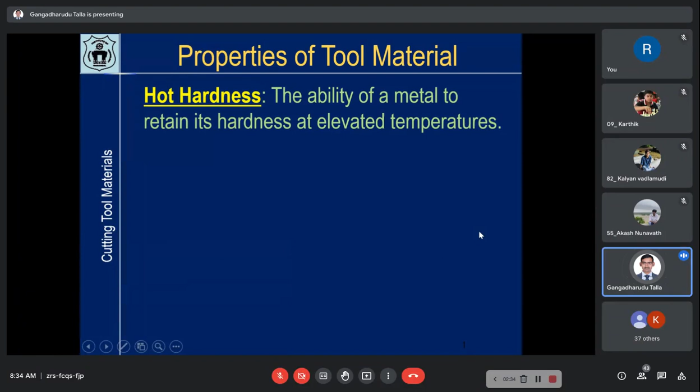Now next is toughness. What is toughness? Resistance of a material to breakage, chipping, or cracking under impact or stress. So toughness is opposite to brittleness, to understand it we can say like that. So what is toughness, in your words, you can say what is toughness. Here exact definition is not given. Here they are saying it is resistance of a material to breakage, chipping, and cracking under impact or stress. This is an indirect way of putting the toughness definition. What is the simple definition of toughness?

Resistance of the material. Resistance to... yeah, resistance to what? To oppose the deformation. Yes, toughness is resistance to deformation, or the ability to absorb the energy for a given material. So if the tool material is tough, it will not break, instead it will absorb the energy and it will not deform. If the toughness is high, it will not break also at the same time. If it is brittle, it will break; but if it can absorb the energy, it will not break, up to certain limit, if the toughness is high. So it will oppose the deformation. That is also important - tool should not deform during cutting process. If it is deforming, then obviously you will not get the required finish, etc. So it should not deform. So for that, it should have good toughness and wear resistance.

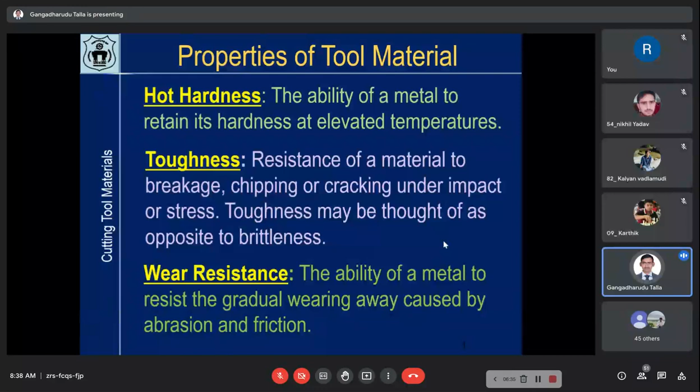Now here, this hardness ranges for various tool materials is given. We'll talk about these tool materials, but you should understand these are the hardness ranges. HSS tool 83 to 86. Cast alloys 82 to 84. Carbides, tungsten carbide 1800 to 2400. Titanium carbide up to 3200. Ceramics 2000 to 3000. CBN is cubic boron nitride, about 4000 to 5000. And diamond about 7000 to 8000. These are the hardness ranges. So based on the application, meaning the type of workpiece material and the process parameters, we have to choose the appropriate cutting tool material.

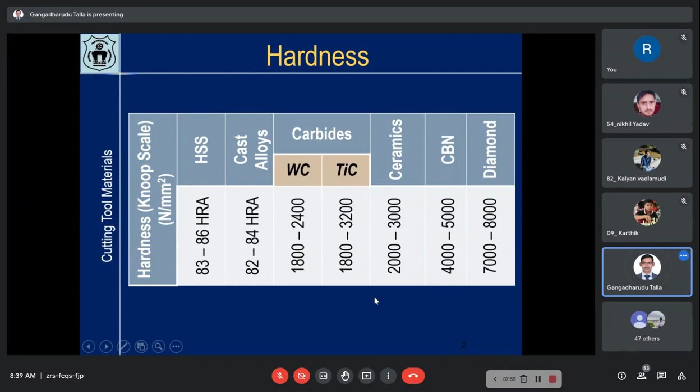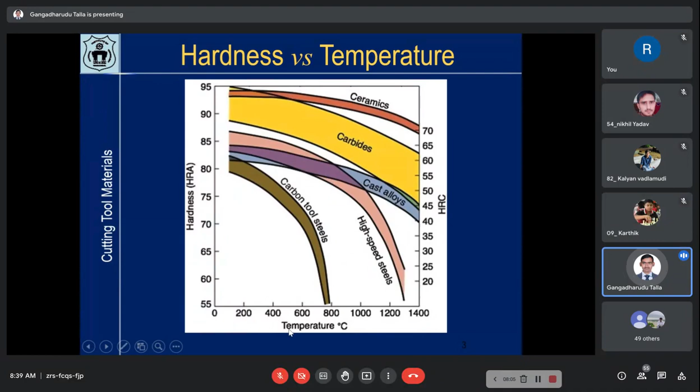Now hardness versus temperature, we all know that. Here you can see as the temperature is increasing, hardness is coming down for any material.

If you see carbon tool steels, their hardness is coming down rapidly with temperature. If you see ceramics, as the temperature is increasing, the hardness is coming down anyhow, but the rate is not very high. So ceramics can withstand higher temperatures without losing their shape, followed by carbides. High speed steel is also losing its hardness at elevated temperatures, but it is better than carbon tool steels. So with temperature, hardness is decreasing, and ceramics have better hardness compared to other materials.

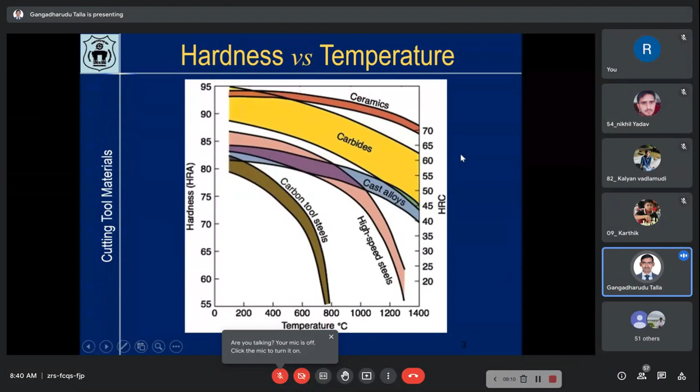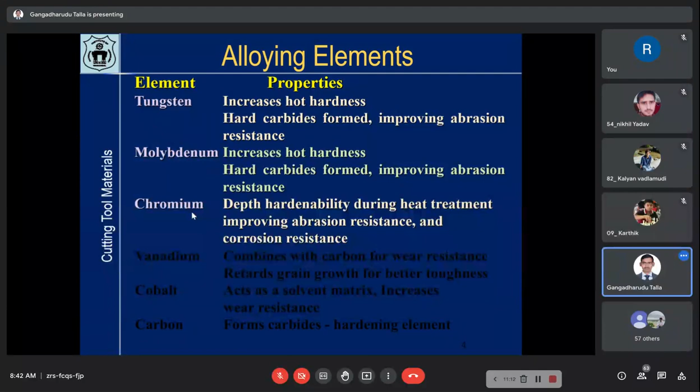Chromium deepens hardenability during heat treatment, improving abrasion resistance and corrosion resistance. So the main thing here is corrosion. If you are including chromium, corrosion resistance will improve. Corrosion resistance is also one required property for the tool material, but it is not the very important parameter.

Vanadium combines with carbon for wear resistance and retards grain growth for better toughness. So if you are adding vanadium, it will decrease the grain growth, that means you will have fine grains, and fine grains mean better toughness. If you have larger grains, then it will become brittle and it will break.

Cobalt acts as a solvent matrix and it increases the wear resistance. So cobalt will be generally used with tungsten, the tungsten carbide and cobalt combination, where it will act as a binder.

Carbon, obviously, forms carbides, so it is a hardening element. Hardness will increase when you are increasing the carbon content.

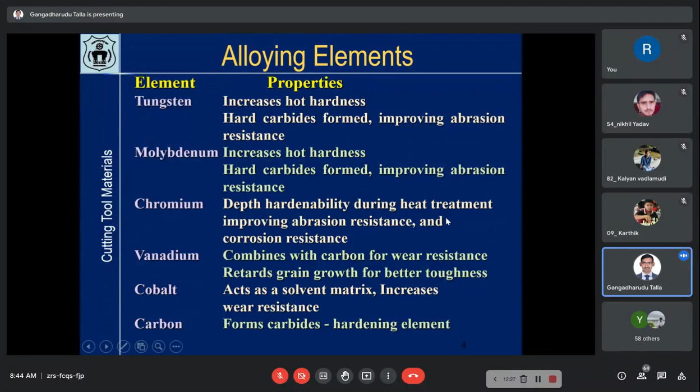Now coming to the types of tool materials one by one, first we will see the carbon steels. High carbon steels are used as cutting tool materials. Carbon range is like 0.6 to 1.5%. So it is a steel, but high carbon steel.

Now small percentage of silicon, manganese, chromium and vanadium are used to help refine grain size and increase tool hardness. We have seen, by including some of these like chromium, vanadium, etc. But silicon and manganese are also given here. We have not discussed those separately, but silicon again will increase the hardness, etc. So we are including them for increasing the toughness and hardness.

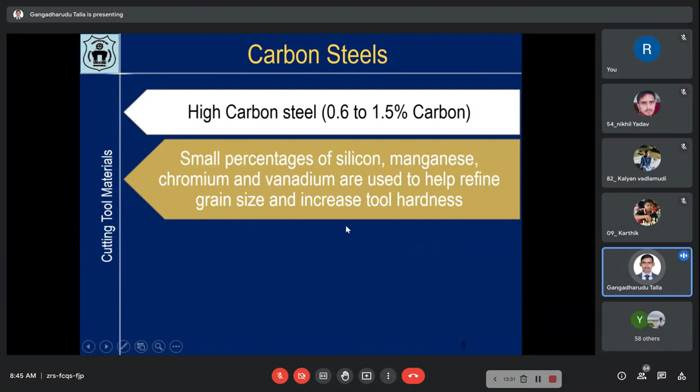So one advantage is they are easily shaped and sharpened. You can easily make the required geometry for the cutting tool because machining carbon steels is not very difficult. So that is the advantage.

And greater resistance to abrasive wear. So this is also one advantage. Abrasive wear will be less.

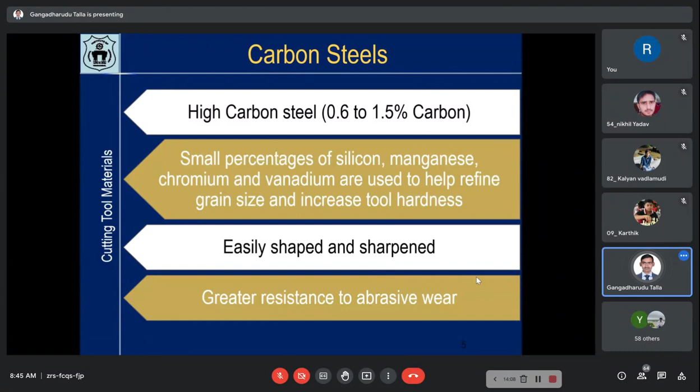Now widely used for files, saw blades, chisels, taps, broaches, and reamers. These are also cutting tools. A file, we will not say it is a single point cutting tool, it is a kind of tool, not exactly a cutting tool. We will say files, saw blades, chisels - these are all tools used to remove material. So they can be made with these carbon steels.

You might have already seen in workshop. Have you gone through workshop? Have you visited the workshop or have you been to workshop? Maybe some of you - yes sir. Yeah, so there you might have seen these files, you might have done filing for fitting operations. So those files are carbon steel files only. Chisels also you might have seen in carpentry, etc.

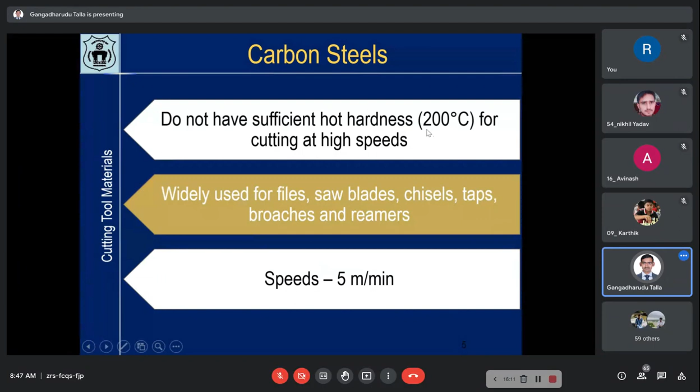So that is about carbon steels. Now the next type is high speed steels, short form HSS. This is a very famous cutting tool material, one of the tool materials developed for cutting tool purposes in the initial stages. That's why the name is given as high speed steel.

At that point of time, this cutting tool material was used at higher speeds. That was the high speed at that point of time. But now things have changed, now this is low speed only. But the name has remained the same, so high speed steel.

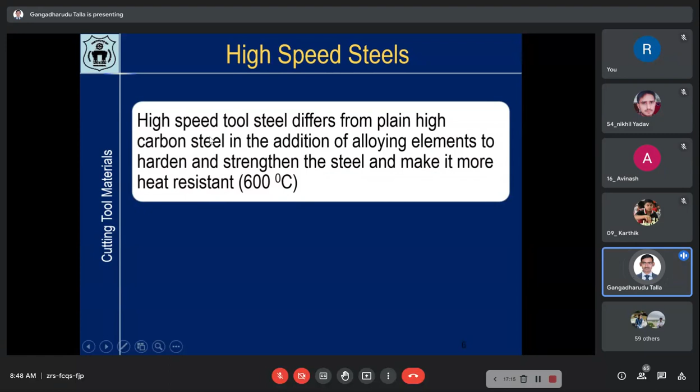High speed tool steel differs from plain high carbon steel in the addition of alloying elements to harden and strengthen the steel and make it more heat resistant. So it can be operated up to 600 degrees Celsius. Hot hardness is high.

So alloying elements include manganese, chromium, tungsten, vanadium, molybdenum, cobalt, and niobium.

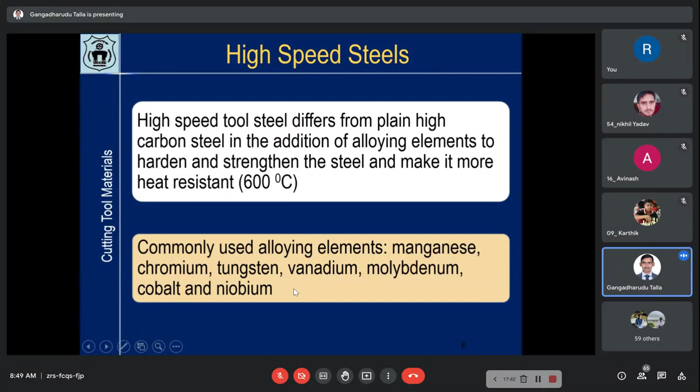So here there are two series in HSS. One is called the M series. Here you will have 10% of molybdenum with chromium, vanadium, tungsten, and cobalt as the remaining materials, and of course the rest will be ferrous. This represents tool steels of the molybdenum type. HSS M series means molybdenum type, so 10% of molybdenum.

Another is the T series. Here the tungsten content is high: 18% tungsten, 4% chromium, 1% vanadium, and cobalt as alloying elements represent those of the tungsten type. So this is T series because of tungsten. Even though the chemical representation is W, it just starts with a T, so it is T series.

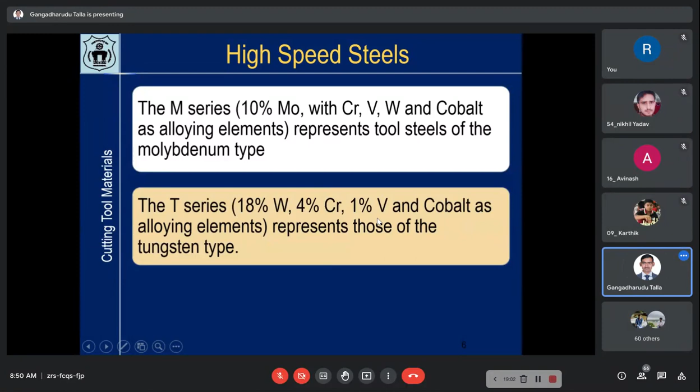The tool geometry and mechanics of chip formation are complex, such as helical twist drills, reamers, gear cutters, form tools, broaches, etc. So HSS tools can be used for complex cutting tool materials. Now what is a complex cutting tool material? A single point turning tool has a simple geometry we can understand, but if you are talking about a drill bit, a twist drill, you will have flutes cut on the drill bit, a helix shape. So that is a complex shape. For such cutting tools, we can use HSS material.

Reamer, then gear cutter, that is also one kind of tool. If you are talking about any form tools, forming operations on a lathe machine, there you can use the HSS material.

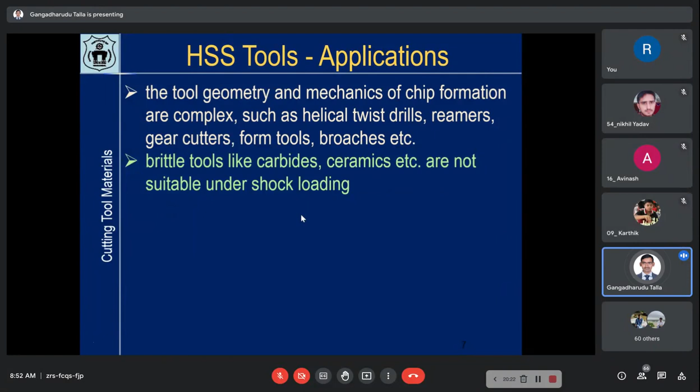Now brittle tools like carbides, ceramics, etc. are not suitable under shock loading. So shock loading means the force is varying. Whenever there is varying force, brittle materials cannot withstand it, they will break, even though they are hard, if they are brittle, they will break. So HSS's advantage is mainly that it is tough. Toughness is high, very high compared to many other tool materials. I will say it has the best toughness among these tool materials.

So it can be used for shock loading cases. Now, when will you encounter this shock loading? Suppose step turning, or if you are doing some eccentric turning, then in those cases you will have this shock loading.

Small scale industries cannot afford costlier tools. That is also one of the reasons for using HSS. HSS is cheap compared to other tool materials like carbides, or any other. CBN or diamond is anyhow very costly.

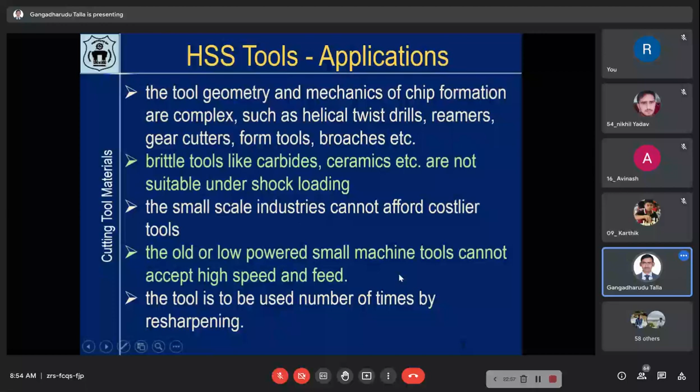Now another type of tool material is cast cobalt alloys. A typical composition for this class of tool material is 45% cobalt, 21% tungsten, and 2% carbon, which gives a hot hardness of 750 degrees Celsius. So its hot hardness is better.

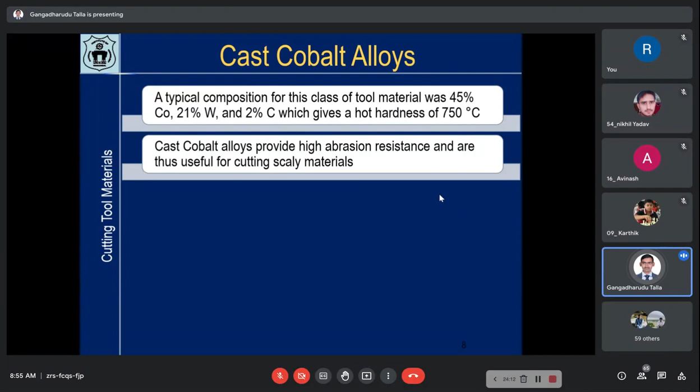Cast cobalt alloys provide high abrasion resistance and are thus useful for cutting scaly materials. Because of the high amount of cobalt, abrasion resistance is high and corrosion resistance is also high. Once the abrasion resistance is high, you can cut scaly materials. Scaly material is where scaling has formed on the surface due to oxidation, so those kinds of materials can be cut.

They are not as tough as HSS and are sensitive to interrupted cutting operations. So toughness is less compared to HSS, and they cannot be used for interrupted cutting operations, as they may fail.

When applying cast cobalt alloy tools, their brittleness should be kept in mind and sufficient support should be provided. So they are brittle, that is a problem. When dealing with brittle material, you should not operate at high speeds, and there should not be any fluctuation in the cutting forces, etc.

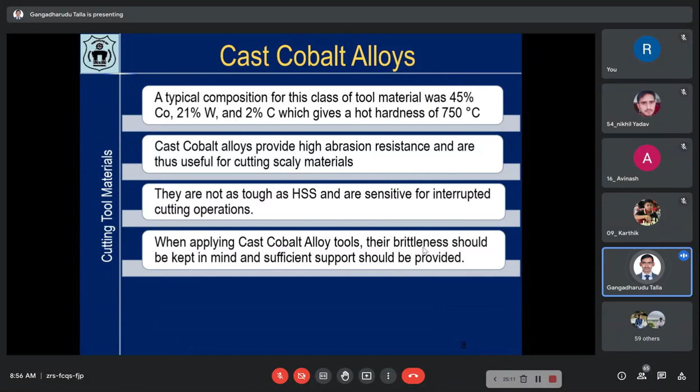If you are operating at high speed, a high amount of force will come onto the cutting tool, so then it will break. Now the speed range is about 45 to 60 meter per minute.

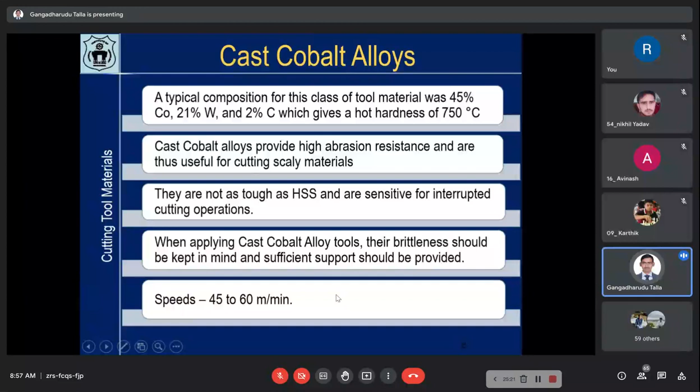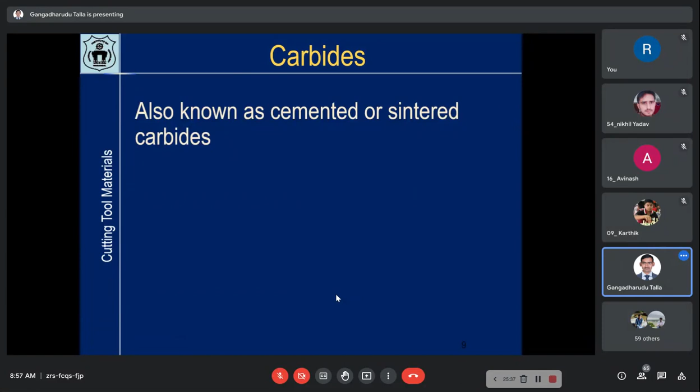Now next is carbides, also known as cemented or sintered carbide. Here you can see high hardness, up to about 1000 degrees Celsius will have good hardness.

High elastic modulus - what does that mean? It will not break easily, elasticity is more. Now high thermal conductivity, high abrasive resistance, and high chemical stability. So these are the properties of these carbides.

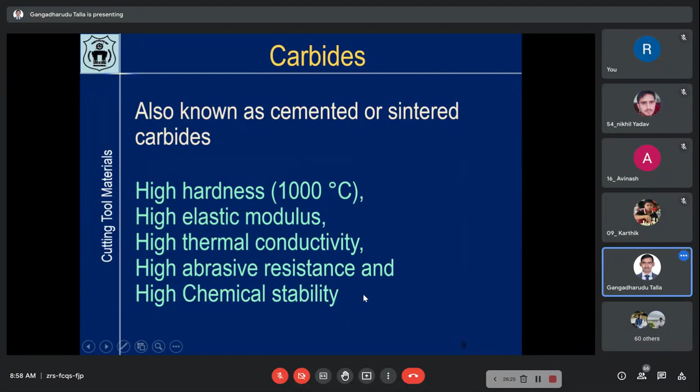So most carbide tools are either straight tungsten carbide - carbide tool generally means tungsten carbide - or multi-carbides of tungsten titanium, that means tungsten carbide, titanium carbide combination, or tungsten titanium and tantalum carbides, depending upon the work material. You can use this in the range of 150 to 250 meter per minute speeds.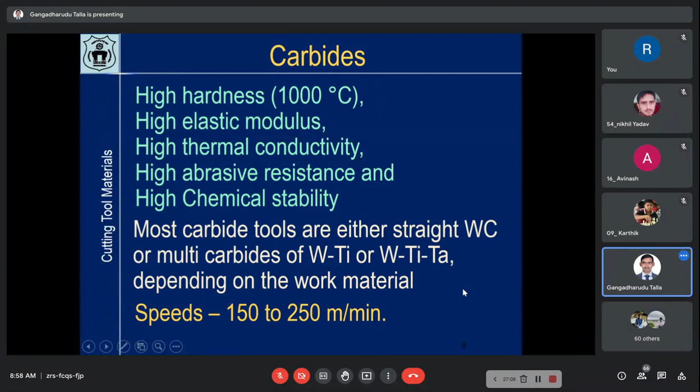Now let us say we have used one cutting edge, this one. Once this is used, let us say it has worn out after some time. Now you can use another side as the cutting edge, this side. So 2 times you can use this particular tool, because the other side will also be damaged from cutting here.

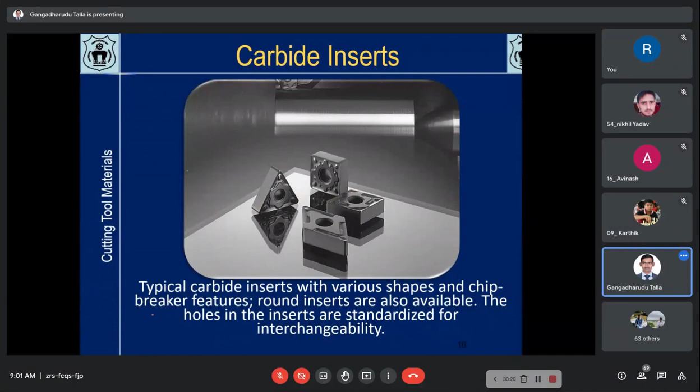Now methods of attaching inserts to tool holders - this we have seen earlier. One way is you can directly braze this cutting insert into the tool holder, making it permanent. Generally we won't prefer it; that kind of method is preferred only for ceramic inserts, or CBN diamond, not for carbide inserts. So generally, clamping is used.

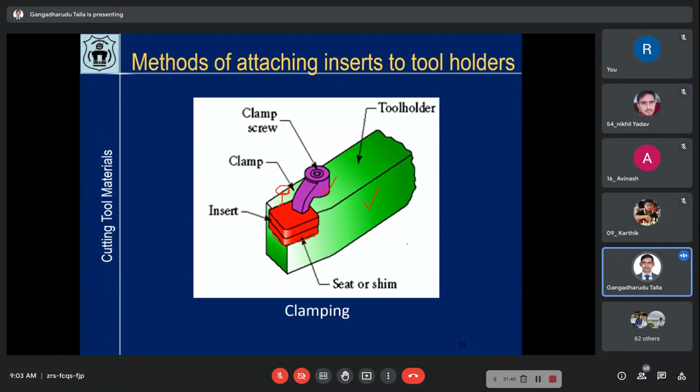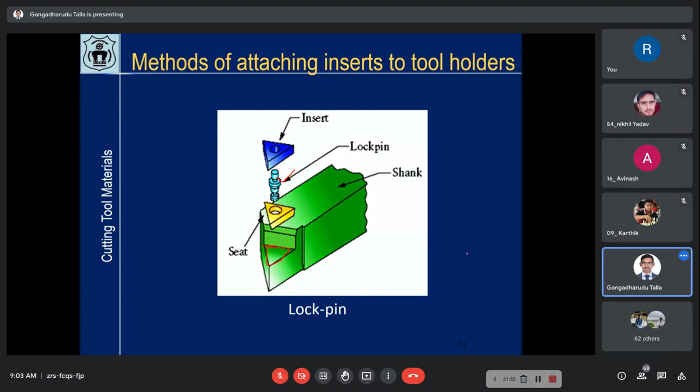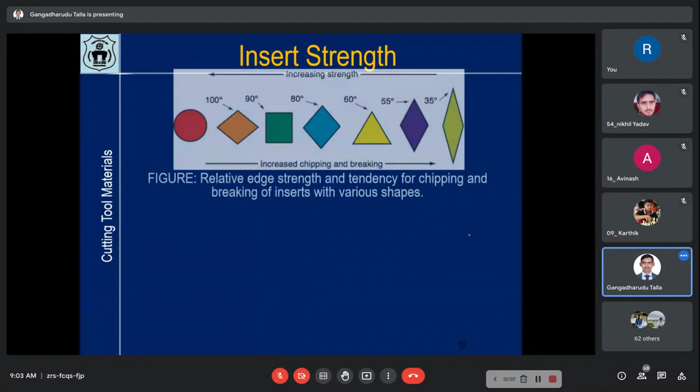Now insert strength. You can see circular inserts are also there, but very rarely we'll use them. So square type - square means not exactly 90 degree, need not be - 100 degree angle, that is one type of insert. 90 degree is perfect square. 80 degree, 60 degree that is a triangle, 55 degree, and 35 degree. These are some of the standard cutting tool shapes, cutting tool insert shapes.

Now here you can see relative edge strength and tendency for chipping and breaking of inserts with various shapes, increasing in this order. So here it is strong, here its strength is less compared to this. This is obvious - when the tool is becoming thin, its chipping and breaking capacity will increase, so more chipping and breakage chances will also be more. But the tool is sharp, that is the advantage, and with less amount of force you can remove the material. That is the advantage.

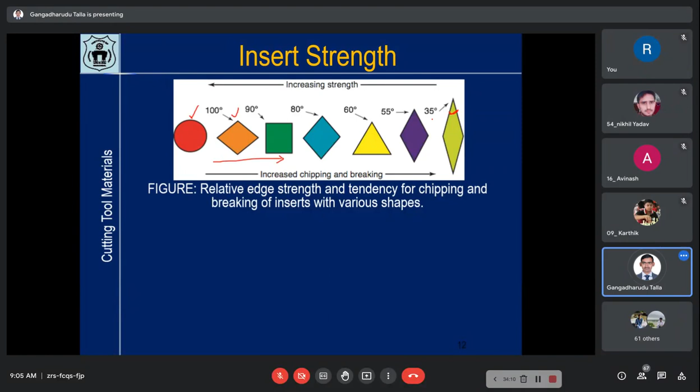So same thing, increasing edge strength - here you will have better edge strength, second best like that.

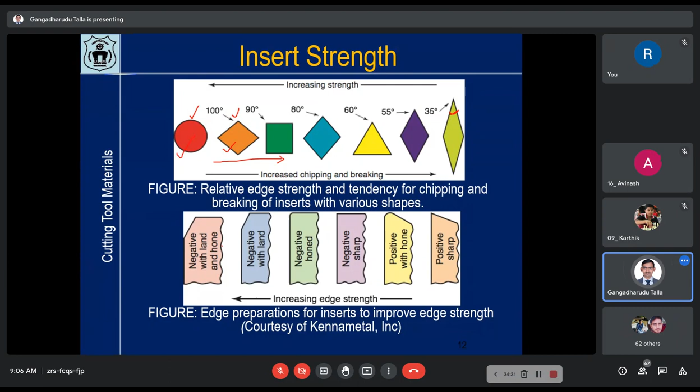Negative with land and hone. Landing is also provided sometimes for the cutting tool. Generally this is the cutting tool shape, but for some cutting tools they will be like this - here you are providing some negative rake, very small length, and after that it is anyhow positive rake only. This is because you want to increase the strength of the tip. So this kind of landing is also provided on some cutting tools. Hone is nothing but rounding off this cutting edge to some extent - it will not be exactly sharp, you are providing some curvature. If you do that, you will have better edge strength.

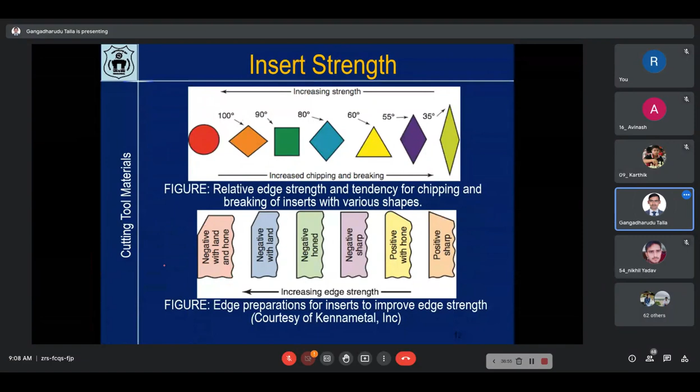So anyhow, this is a positive rake. If it is a negative rake and you are providing land and hone, all three combinations, then edge strength is very high. Negative rake and land - little bit less strength. Negative and hone - little bit less. So this is the order: negative and sharp, then finally positive with hone and positive with sharp edge will have the lowest strength. But these are also required because sharpness is the ultimate thing we want for cutting purpose - we should have sharp cutting tool. So just to increase the strength, we cannot go only for these other tools. But if you want to cut very high strength material, then you have to use these kind of negative rake angle. Depending upon the application, you have to choose - all are required for different applications.

Now another type of cutting tool material is coated carbide inserts. The necessity - why we need coated carbide inserts - is that new alloys and engineered materials have high strength and toughness, and these materials are generally abrasive and chemically reactive with tool materials.

So recently we are inventing different new materials like nickel based alloys, magnesium based alloys, titanium alloys - many alloys are coming up. To cut them you need very high strength and high toughness for the cutting tools. One more problem is they will be chemically reactive with the cutting tool material. Why chemically reactive - generally cutting tool material itself will have tungsten, titanium, etc. But your workpiece is having, let's say, titanium. Consider titanium carbide cutting tool and workpiece is a titanium alloy - obviously there will be chemical affinity. Titanium is present in both the tool and the workpiece, but maybe different quantities. That is one problem. At elevated temperature, diffusion will take place - from high density to low density, material will transfer. So that will not work if you have the same material in the workpiece and the tool. That's why you have to use coated carbide inserts.

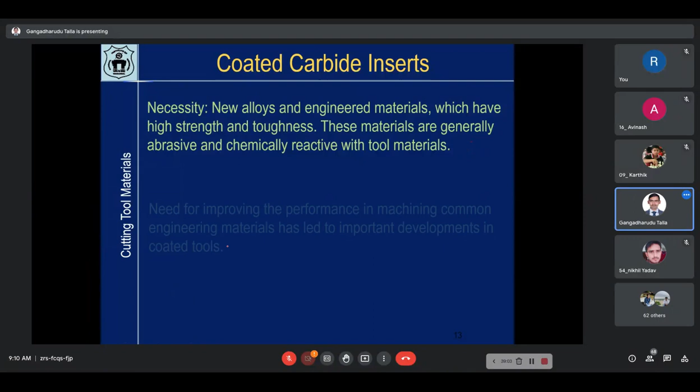Need for improving performance in machining common engineering materials has led to important developments in coated tools. So for existing materials also, if not the advanced materials, if you want to get good surface finish etc., you can use coated carbide inserts. The thickness of these coatings is in the order of 2 to 10 microns - coating is very thin, a very thin layer of coating will be given on the cutting insert. Inside material maybe some carbide insert will be there, and on top of that you will coat some other material like titanium carbide.

We'll see what the general coating materials are also. Now you can use these coated carbide inserts in the speed ranges of about 200 to 250 meters per minute.

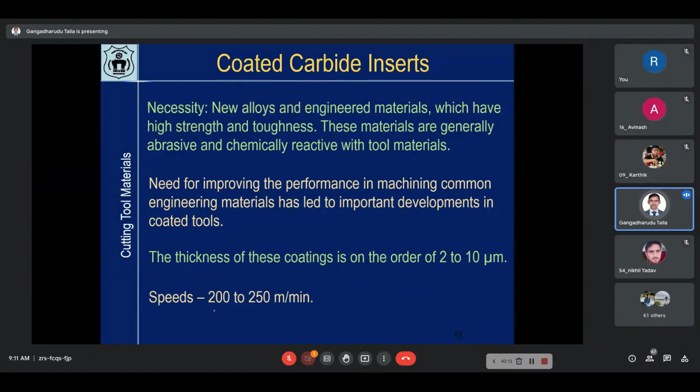Now, what is the role of coatings, or why are we coating the insert? What are you achieving by coating?

Reduction of abrasion, adhesion, and diffusion wear. If you are coating with a suitable material, let's say titanium carbide, abrasive resistance is high. It may not be adhesive to the workpiece material, depending upon the workpiece material you are cutting, and diffusion wear will also be less.

Now, reduction of friction and built-up edge formation. To avoid these, we are coating with different materials. Don't think that we are coating only titanium carbide, and if you coat titanium carbide, you cannot machine titanium alloys. You have to machine some other materials.

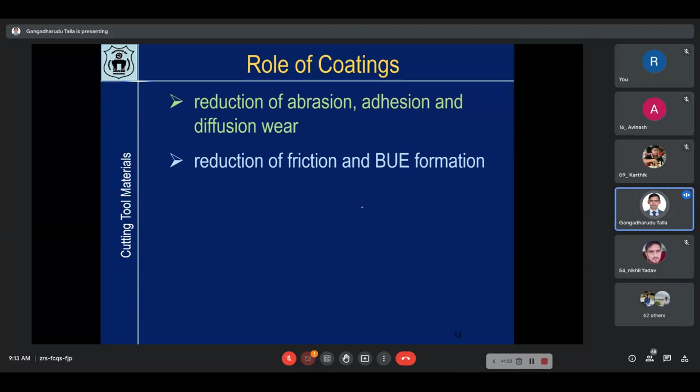So reduction of friction and built-up edge formation. Friction will reduce by coatings. Some of the coatings will reduce the friction, so the chip will smoothly slide over the rake surface, and built-up edge formation will also be reduced. So that is one advantage when you are coating.

Now, heat resistance and reduction of thermal cracking and plastic deformation. These coatings will have greater heat resistance, so thermal cracking can be avoided and plastic deformation can also be avoided.

Now what is this thermal cracking? During cutting, temperature is increasing. Once you stop the machining process, or whenever you pause it, the tool will be cooled off, and then cracking may take place. Then plastic deformation - when the temperature is high, the material will become soft and plastic deformation may take place. But when you coat with heat resistant material, you can avoid this cracking and plastic deformation.

So, improved surface quality. If the friction is less by coating, and you can remove the material with less force, then obviously the surface finish will be better. This is one major thing you have to observe.

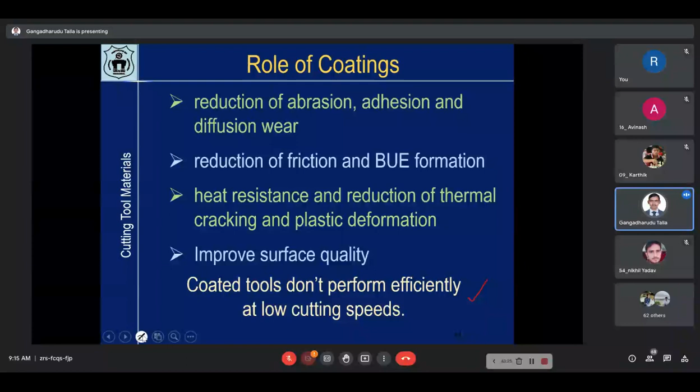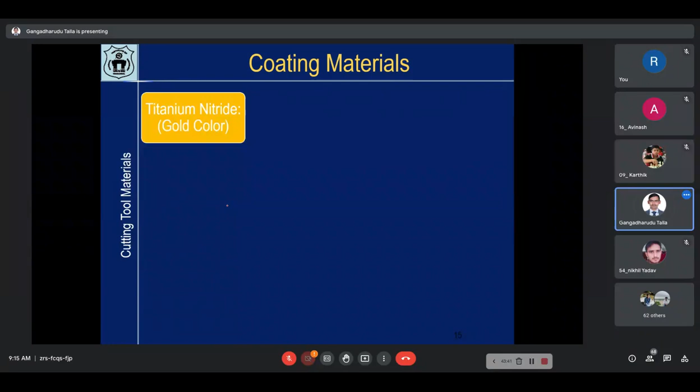Coating materials: titanium nitride is one coating material that is gold in color. Its properties include low friction coefficient, high hardness, and resistance to high temperature.

Titanium carbide is gray in color, with high flank wear resistance in machining abrasive materials, and good adhesion to the substrate. It will easily adhere to the substrate because titanium carbide and the insert are both carbide. So there will be good bonding between these, and because it is carbide, it can withstand abrasion. Flank wear takes place mainly due to abrasion - there are other forms of wear also, which we'll study later.

Ceramics are black in color, with high chemical inertness - we all know ceramics are chemically inert. That's why from olden days we store chemicals or pickles in ceramic pots and vessels. So chemical inertness is there. Low thermal conductivity is also well known. High thermal stability means heat resistance to flank and crater wear also. Flank wear means high abrasion, and crater wear is generally due to adhesion, so adhesion will also be less.

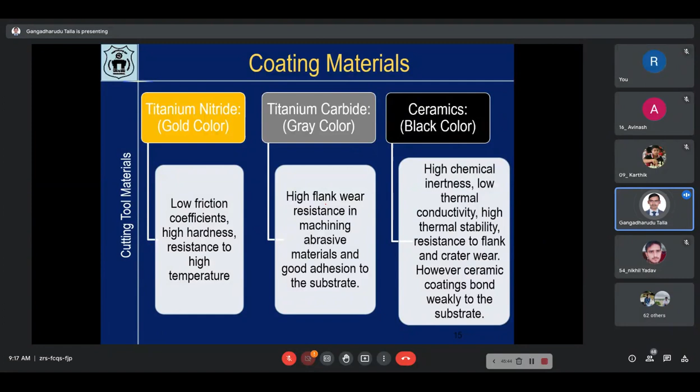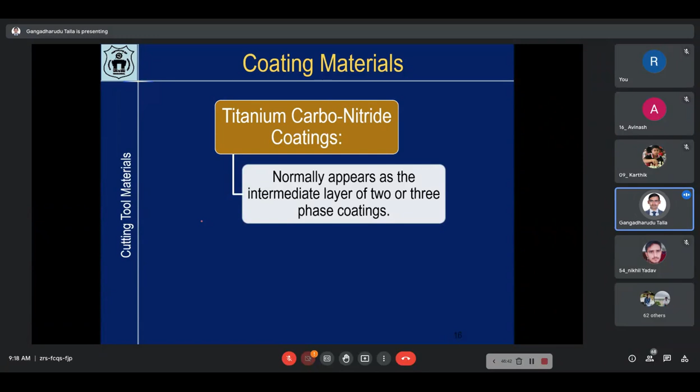So this is another combination, of carbon and nitrogen. This normally appears as the intermediate layer of 2 or 3 phase coatings. Sometimes you coat 2-3 different materials on the same insert, one after the other, layer by layer. In those cases, it is used as an intermediate coating - at the bottom you use titanium carbide, in the intermediate you use titanium carbonitride, and on top you use titanium nitride.

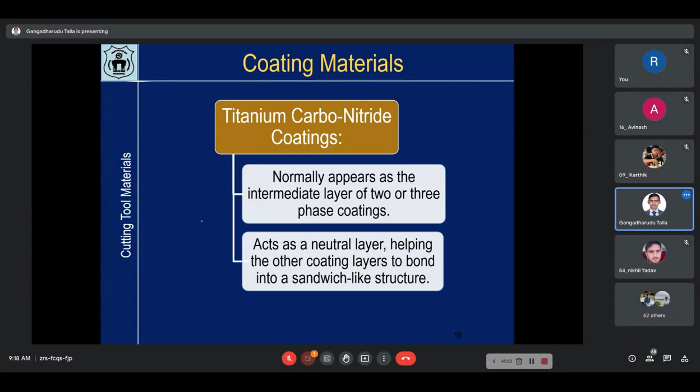It acts as a neutral layer, helping the other coating layers bond into a sandwich-like structure.

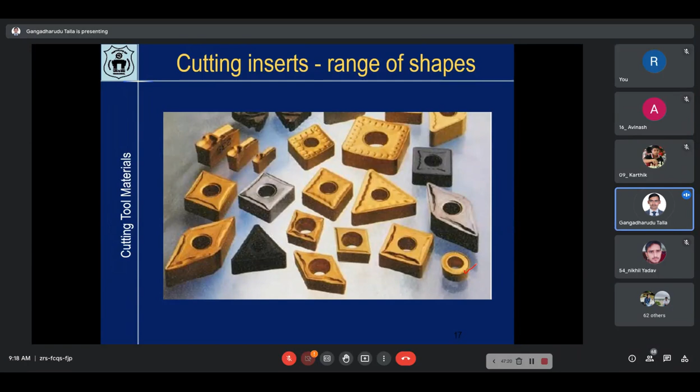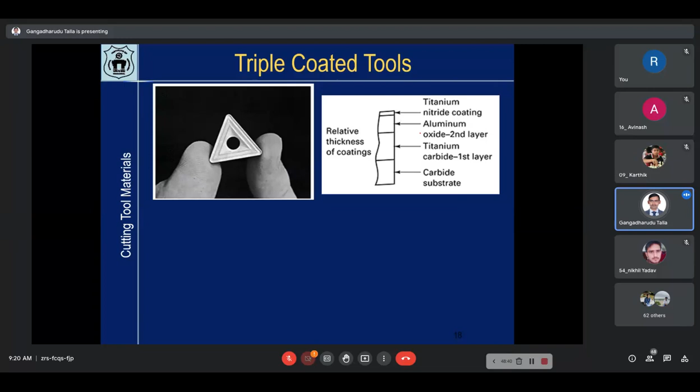The combinations will vary depending upon the requirement - this is one example. Aluminum oxide as the second layer, then titanium nitride is used at the top. This aluminum oxide bonds well with both the titanium carbide and titanium nitride. We have also seen titanium carbonitride used as the sandwich material - that is another combination. This is one example given here.

In the second case, you can see tungsten carbide is the material. Then you coat titanium carbide as the first layer, aluminum oxide as the second layer, and titanium nitride at the top.

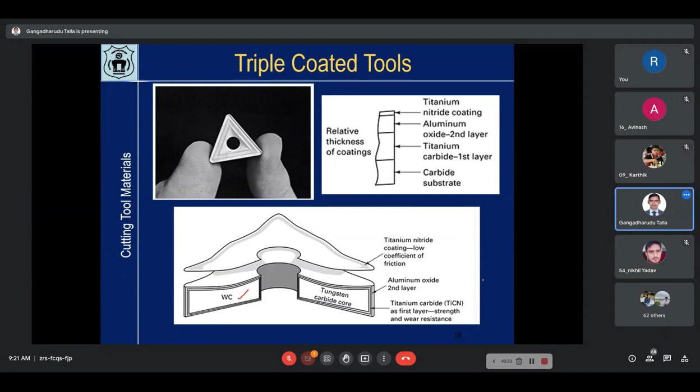First layer should bond well with the substrate. Intermediate layer should bond well and be compatible with both layers. Outer layer should resist wear and have low thermal conductivity. For this reason, we go for this triple coating.

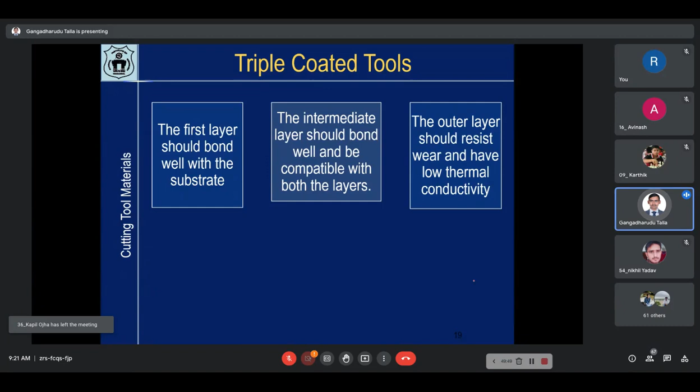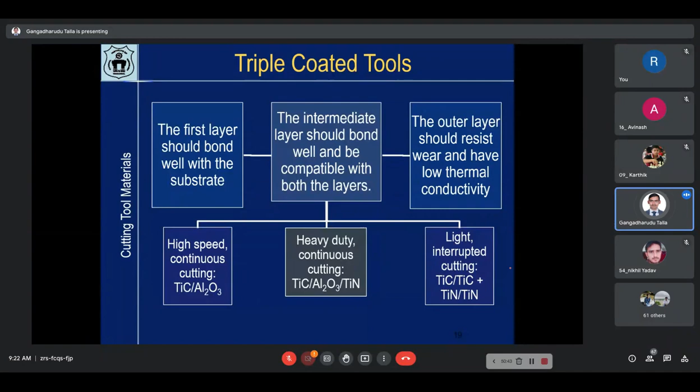Triple coated tools are used for high speed continuous cutting with titanium carbide, aluminum oxide or alumina, and for heavy duty continuous cutting with titanium carbide and alumina. For light interrupted cutting, you use titanium carbide combinations. So depending upon the application, you choose the combination of materials.

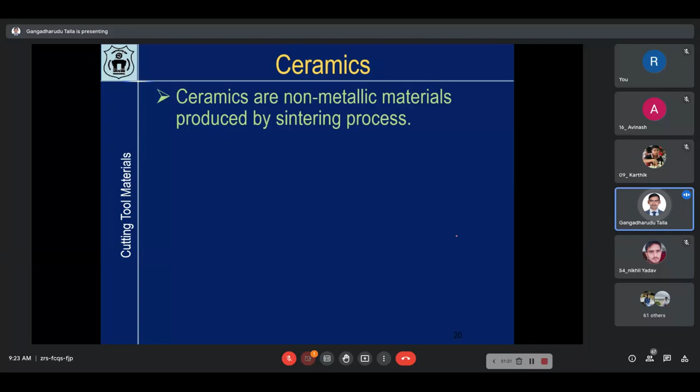Now next is ceramics. Ceramics are non-metallic materials produced by sintering process. Sintering means you take the material in powder form - this is nothing but powder metallurgy. Take the material in powder form, compact it, then sinter it, meaning you heat it below its melting temperature so the material bonds together. So ceramic inserts are prepared through this powder metallurgy method.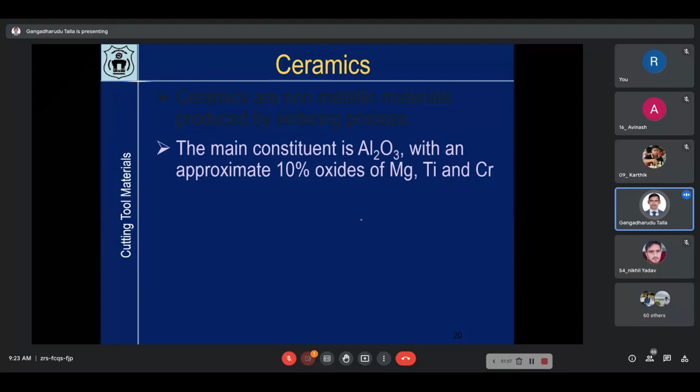The main constituent is alumina with approximately 10% oxides of magnesium, titanium, and chromium. Mainly in ceramic tools you use alumina, and you mix in small quantities of magnesium oxide, titanium, and chromium oxides. Why? Because alumina is cheap, but we need some of the good properties of magnesium, titanium, and chromium.

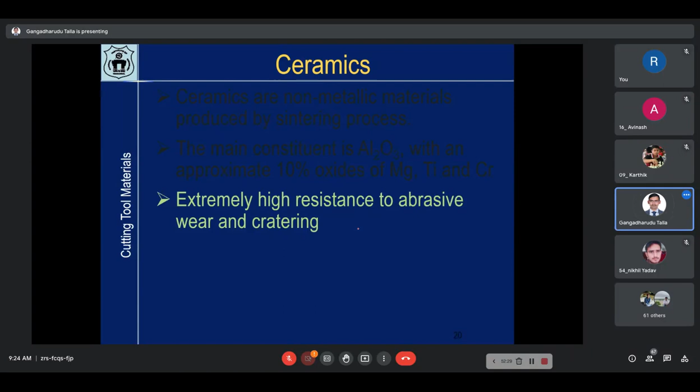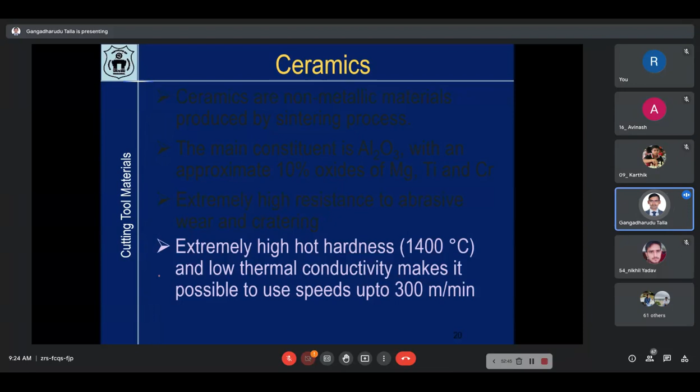Ceramic tools have extremely high resistance to abrasive wear and cratering, because ceramic itself is very hard, and of course brittle at the same time, so its wear resistance is high. They have extremely high hot hardness - up to 1400 degrees Celsius these tools can work. Low thermal conductivity makes it possible to use speeds up to 300 meters per minute, so here speed has increased further.

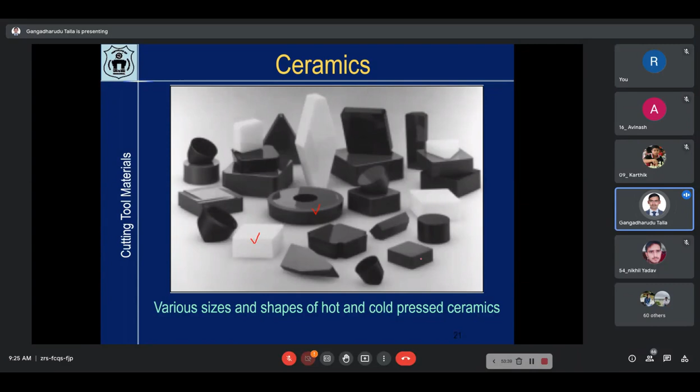Alumina ceramics advantages and disadvantages: very high hardness, hot hardness is also high, chemical stability will be there for any ceramic in general, thermal conductivity is less - these are the properties of alumina. Also high melting point and high abrasive resistance.

Now shortcomings: poor toughness - for any ceramic material toughness is less. Poor tensile strength, meaning the material is very brittle. Poor transverse rupture strength - if the material is like this and you apply force vertical to it, it will break easily. So transverse rupture strength is less. Those are the disadvantages.

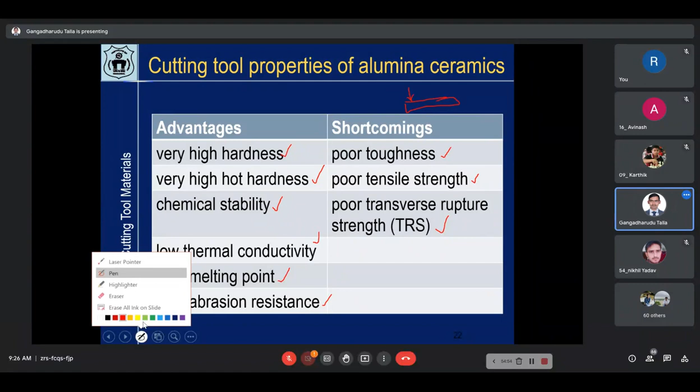Okay, for today let us stop here. We have covered ceramics, and next CBN and diamond - we'll see them in the next class.

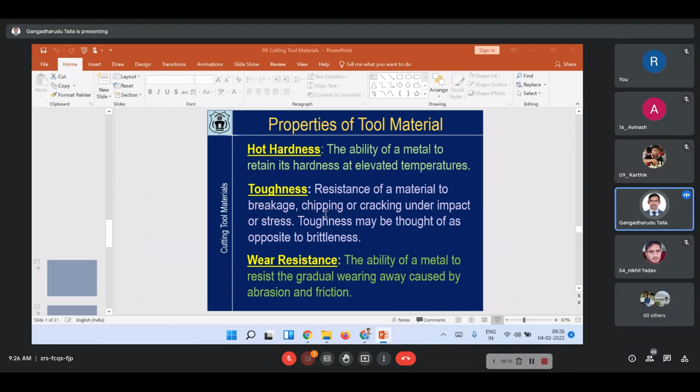Excuse me sir, I have a doubt. Sir, when these coatings get damaged at lower speeds, then how are they able to manage at higher speeds without damaging?

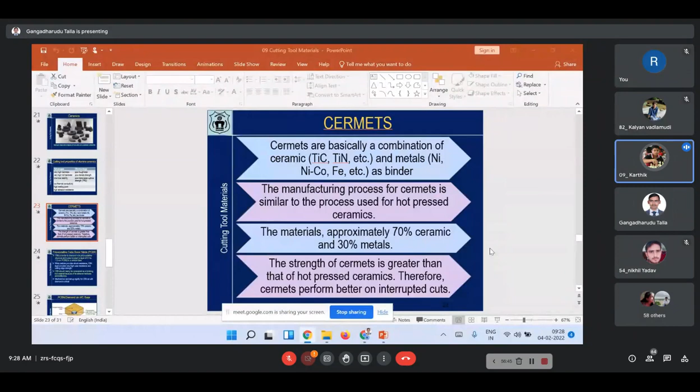That's all for today. Anything else to discuss? I hope all of you are preparing for this minor.